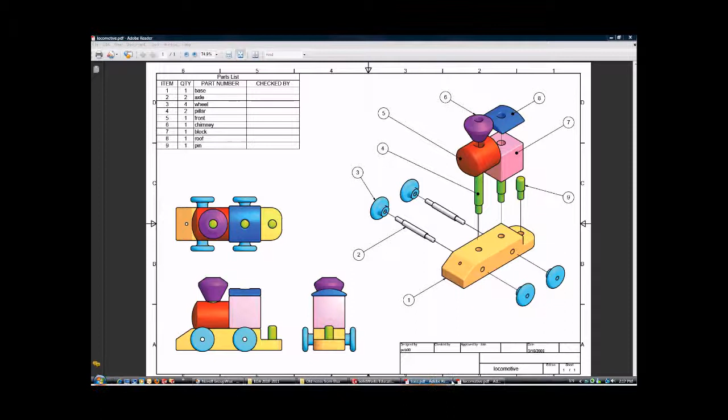So please look at the yellow one, the toy train body. You can see we have got the drawing with the dimension. So you can see we can get some of the dimension here, and then open SolidWorks to draw it.

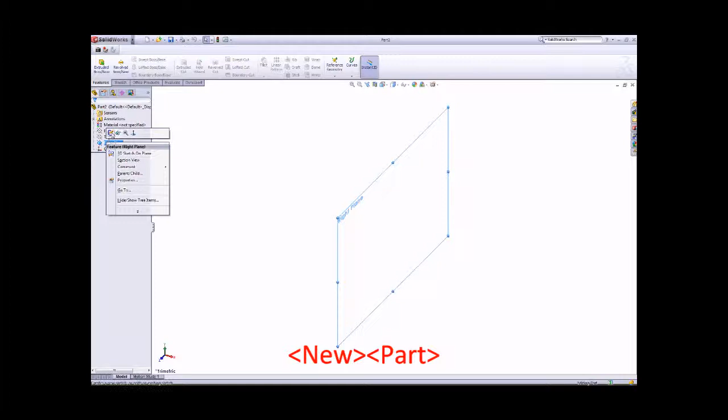I think for that object you need to use the right plane to insert the new sketch. So when you start the new part file, go to the right work plane to insert the new sketch for the center rectangle, and then the smart dimension should be 200 millimeters, and then that one is 40.

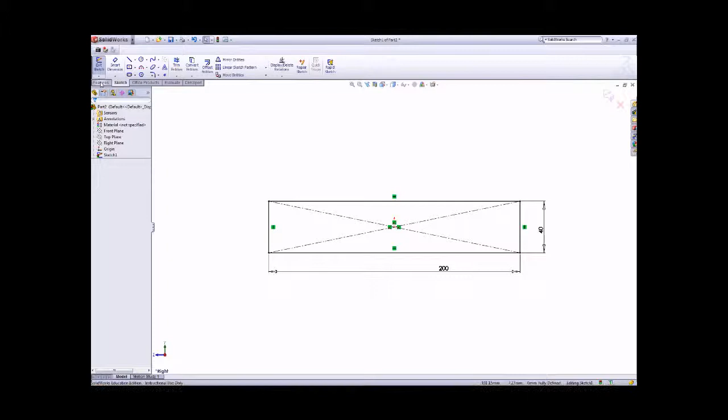So once you have the dimension you can just draw it, and then the extrude is 60. So you can extrude right now for the 3D using extrude boss and base, and that one is 60 millimeters, and then you just take OK.

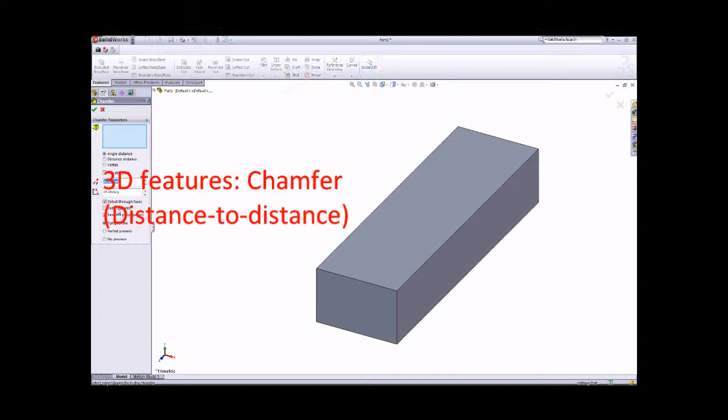And then in this drawing you can make the chamfer here. So for the chamfer you can use the 3D distance-to-distance option, and that one is 30 by 20. So you just click into the edge, you can see 30 and 20.

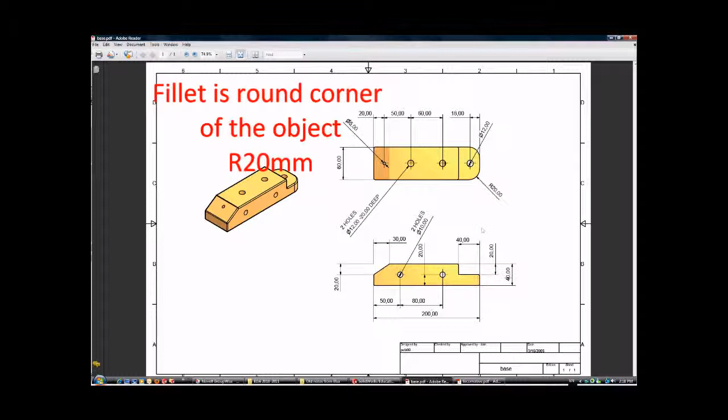You can just make the chamfer here, and then you can also make the fillet, because the fillet has 20 millimeters for the radius. So you just click on the edge, that one and that one, and with full preview you can see the preview window, and then take OK to finish it.

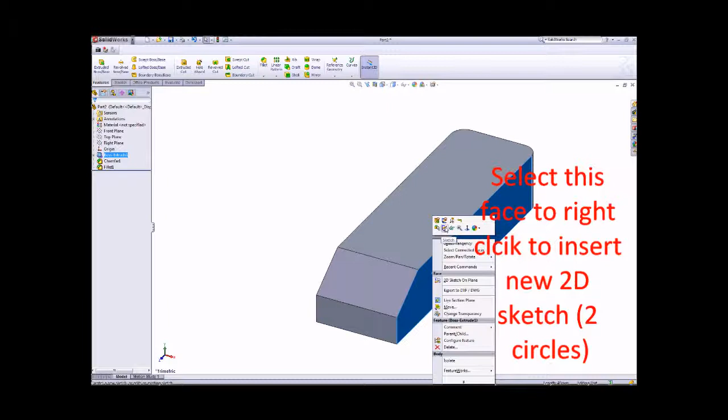And then you can drill the hole using extrude cut. Insert the new sketch on that face, go to the right work plane using the spacebar to change orientation, and then you can sketch two circles, one and the other one should be that one.

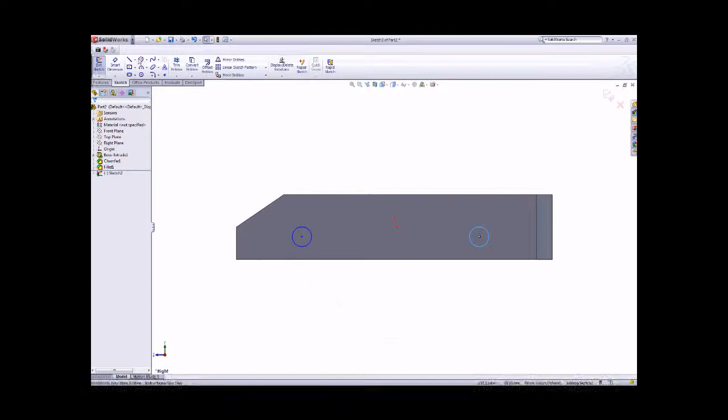Then for the two circles you have got the dimension 10 millimeters, and you have got the location here, because that one is half of 20, and that one is 50-80. So you can just make the smart dimension here for the hole, 10 millimeters, and that one should also be 10, but you can add an equation to relate it to that one.

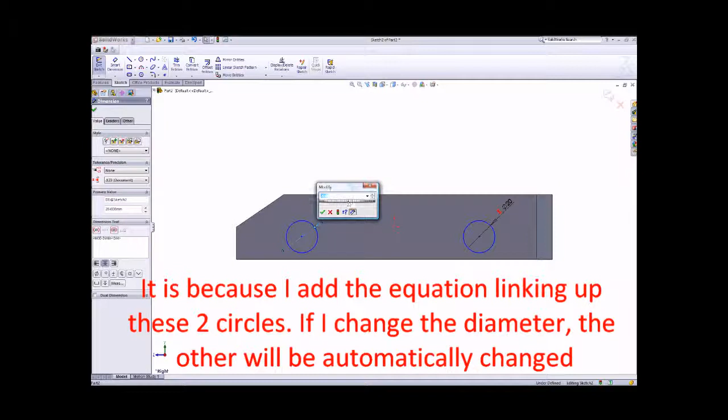That means when I want to change that diameter, maybe change to 20, it will change automatically right now, because I added an equation with that dimension.

So you can see the edge, the center point is 40 or 50, and then 80, that one is 50, and then you just make the smart dimension from circle to circle, which is 80, and then you can see you can just make that one 20, and then you make the other one.

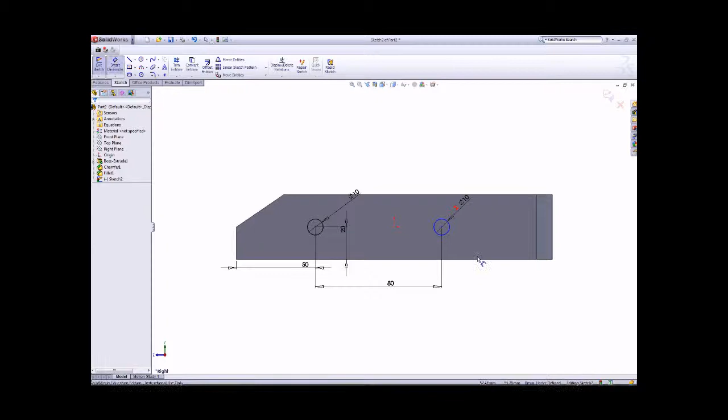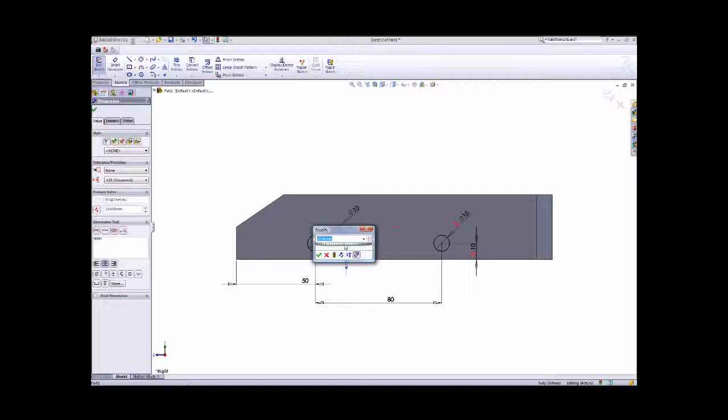That one should also be added with an equation to that smart dimension, because when I change that one, you can see when I change 10, it will change automatically, because I linked the two dimensions together. So you just change 20, you can see it will automatically change in dimension.

So you just click the exit sketch, and then use the spacebar for the isometric view, and then extrude cut for the hole. So you can see the hole, you can just drill it.

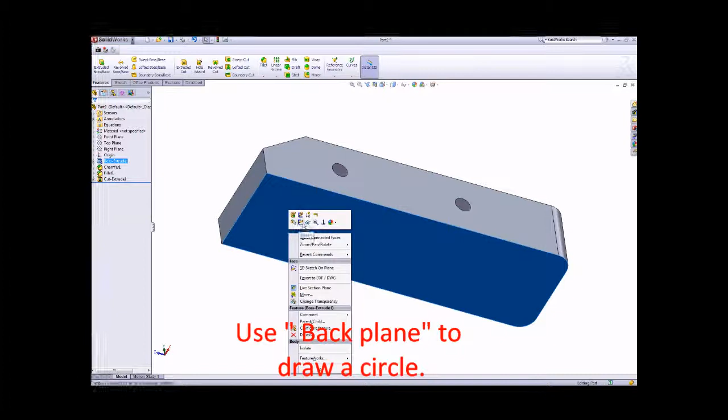And then how can we draw that hole for the diameter 5? Because for that hole, I think we need to use the back view to drill it. So you have got another view, that view, and then insert the new sketch to draw the hole.

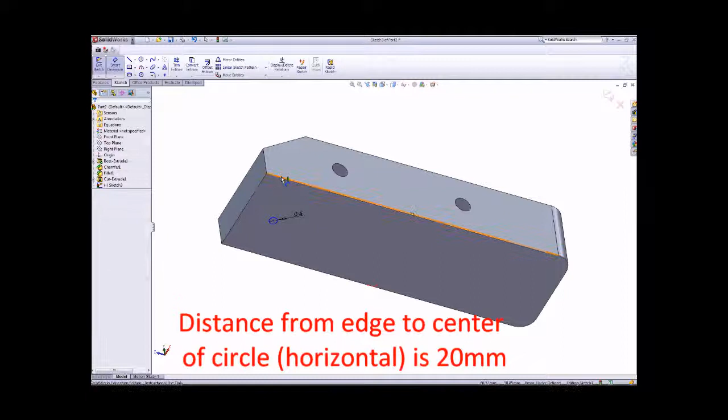The hole should be 5 mm for the diameter, and you can see the distance in between that hole is 20 millimeters. So you have got another smart dimension here, 20 millimeters. And then that one, because the extrusion is 60, so that one is 30.

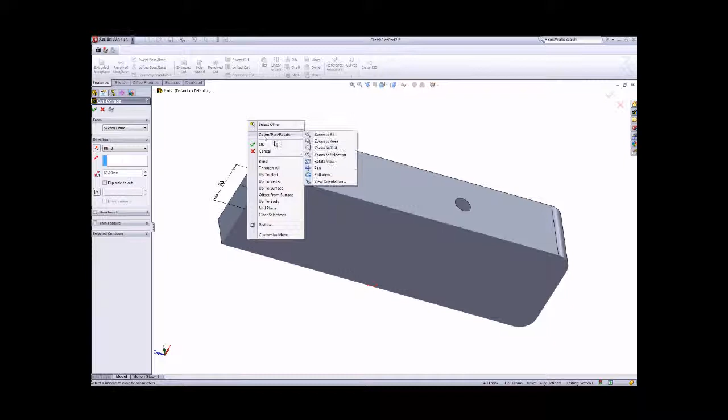You just use extrude cut here and then rotate it, and then you can go up to the surface here, up to surface here, click in that one, and then extrude cut. So you can see that one, when you extrude cut you can build the body.

So for another two holes, you can use that face to insert another new sketch to drill the hole, because the hole is 12 millimeters for the diameter, and the depth is 20 for those two holes. Since we have got different dimensions, you can just follow those joints to build the holes later.

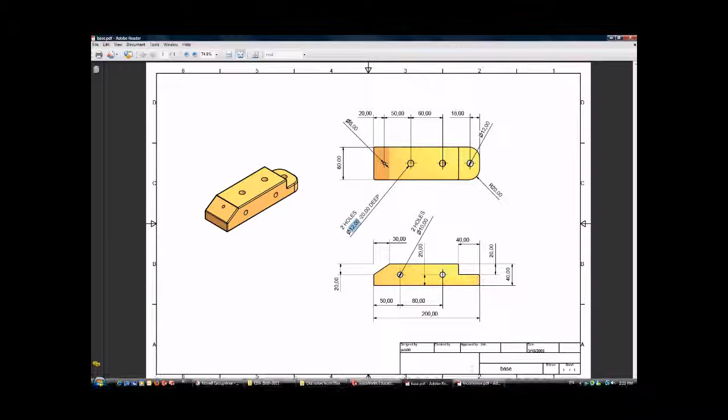That's all of my demonstration. Thank you. Because you just use extrude cut again to drill the two holes, so I do not need to do it again.